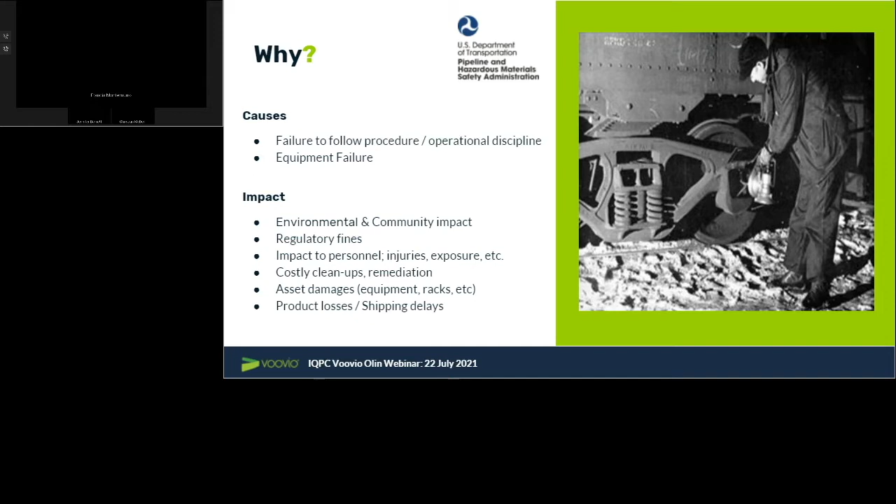So with that, it's my pleasure to turn it over to Jennifer Barnett, who's going to talk to us about Olin and the benefits they've realized using Voovio.

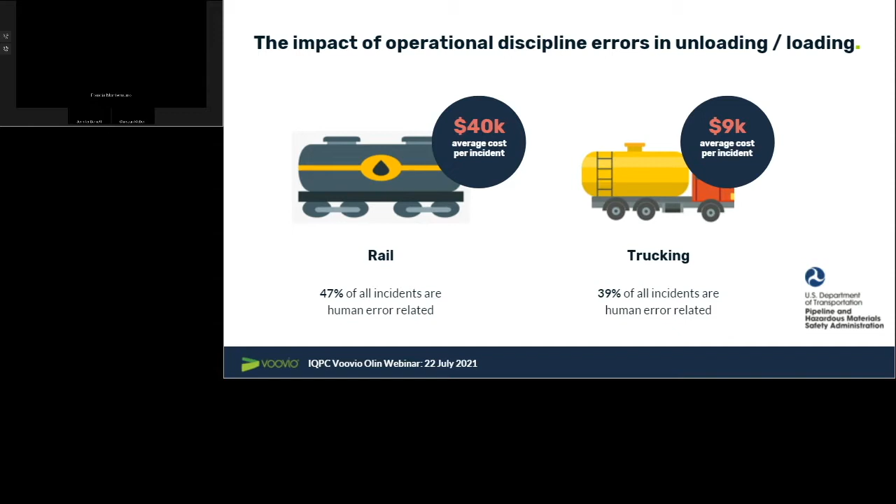Thank you, Fran. So talking about some of the key challenges at loading facilities, and I think it's probably common around every industry that tends to be our hiring point for new operators, that or it's contracted out services. So when we talk about some of the challenges, one of them is the quality of training our new operators are getting, and what's the consistency of that training. We tend to put operators with a senior operator, have them shadow them as part of that training program. So the training is only as good as that senior operator, the training they're providing.

One of the things, too, is a challenge is how do we train our operators to mitigate incidents before they occur? And one of those things is showing them and training them on proper preload inspections and postload inspections and how to identify equipment defects and things such as that.

Another challenge our operators have in a shipping and loading environment is not only are they having to certify in that area process or that loading rack and the procedures and policies for the site, they also have to certify for DOT certifications, and also they have to learn the DOT regulations. So it's almost kind of two certifications that go together.

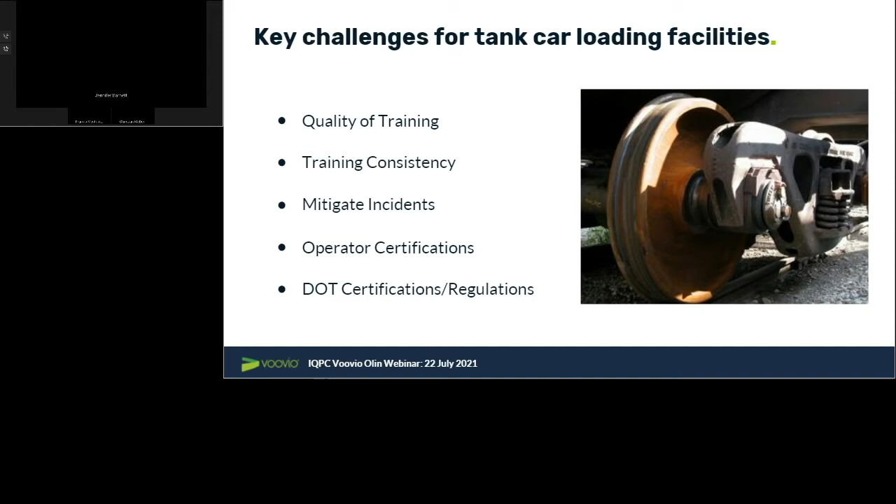So when we talk about the DOT regulations, there are regulations out there that state that, to prevent releases of the product, you have to inspect your cars before you can ship them. The federal regulation 49 CFR 173.31 subpart D states that no person may offer for transportation a tank car containing a hazardous material or a residue of a hazardous material unless that person determines that the tank car is in proper condition and safe for transportation. So that goes for loaded or empty cars.

And what that regulation means is that any closures, any valves, defects, anything that could cause that car to leak that is outside of normal accidents such as derailments or things like that. In other words, it needs to be able to survive the normal transportation conditions such as vibration or temperature change or anything like that. That basically says these inspections should identify that. You should be able to prevent all this. And if you do have a leak in transportation, then DOT will assume that you did not do the proper inspection of that car.

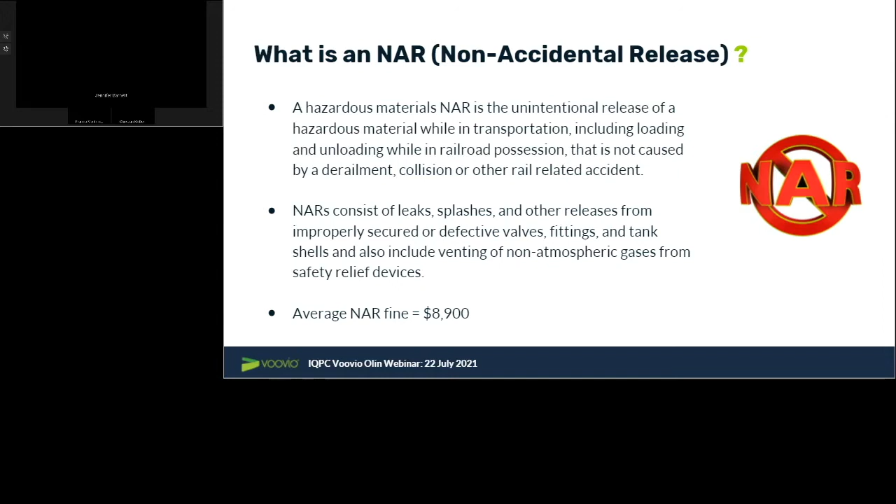I'm going to pass this off to Christian. Okay, thank you, Jennifer. So I'm going to share my screen here. Once it's open, could Nicole confirm you can see my screen? Yes, Christian, we can. Perfect.

So Jennifer and her team worked with us to create a solution for inspections and loading procedures. We're going to share the inspections piece because we're not permitted to show the loading rack area, but this will give you a great overview of the capabilities of the platform. And everything I'm about to show you on the screen may appear a little bit jumpy or jerky because we're sharing this over the conference platform. But if you were utilizing this on your laptop, like I am right now, it would be very smooth.

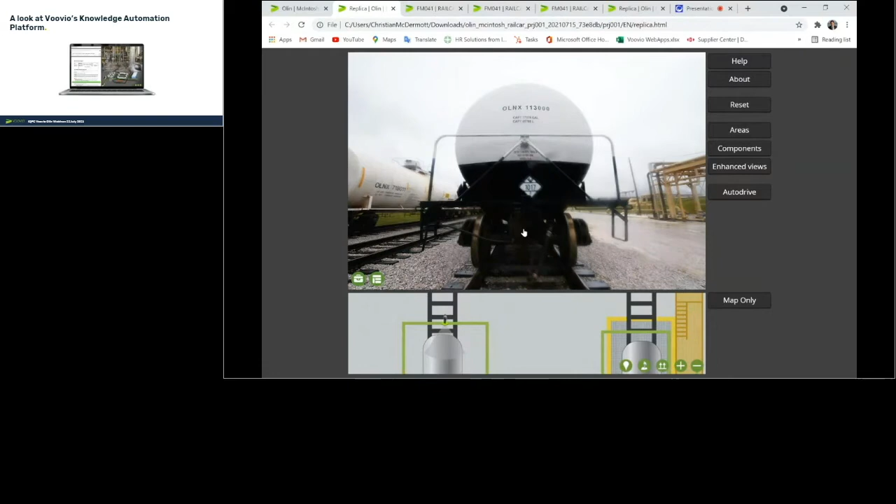So imagine I'm a trainee learning how to inspect rail cars and perform loading procedures. Typically I would have a few hours of classroom training, followed by some hands-on training at a rail yard, walking around a rail car with an SME or a trainer. But you'll see here, what I'm doing now is I'm able to walk around a real rail car. It's a real view of a rail car. I don't need to be in the rail yard, which are incredibly dangerous places. Plus, you need access to a rail car that has to be there and secured properly.

But with Voovio, you're able to walk around and look at all the different inspection points, which you'll see in a minute, 24/7. So I can access this at any time as a trainee. In fact, instructors can use this for virtual training sessions, or you can even use it for in-person classroom training events as well. So you'll see here now I'm at the B end of the rail car. All the components we're going to be looking at are clearly tagged and labeled. And you'll see that I can actually click on a component and get that close-up view.

And Voovio also gives you that ability to interact with equipment. In this case, I'm interacting with the handbrake. But we also simulated the securing and hooking up of a chlorine rail car for Olin, where trainees can interact with all the connections and all the tools they need to perform the inspection procedure and loading procedures as well. What I want to point out here is, as a trainee, I can search for any component around the rail car or the loading rack.

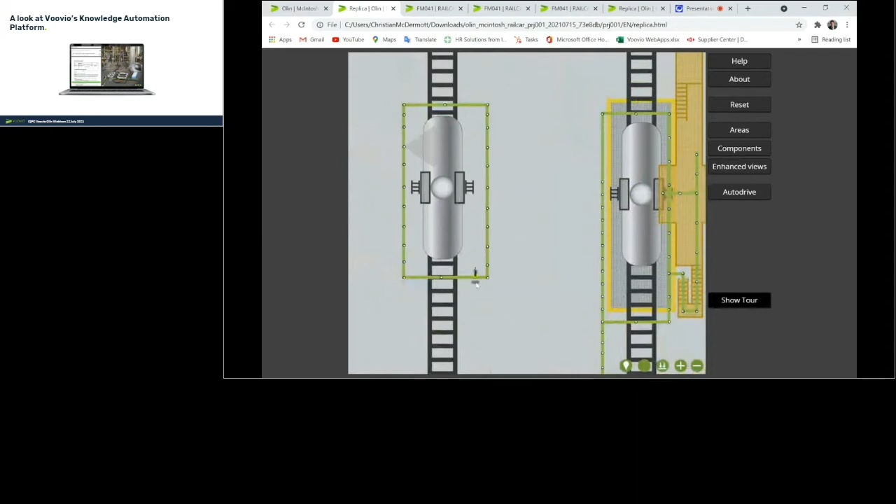So independent of an SME or a trainer, I, as a new trainee, can refer to this anytime, 24/7. The mapper, of course, I showed you. You can also drag and drop to any point in the replica. So great tool to familiarize yourself with the railcar. And I feel pretty confident now. I'm familiar with where everything is. I'm familiar with the railcar.

So let's move to the procedure. So as a trainee, I can practice and learn any procedure on my own 24/7 with this simulator. Now, this simulator I'm about to show you is a guided module, which means it's kind of like a virtual trainer, so a virtual SME. So it's something I can utilize ahead of any hands-on training and post hands-on training.

So let me explain what's on the screen. So we have the replica on the right of the screen. We have the map at the bottom, so I can always see where I'm located. We have the procedure here on the left. You'll see that this procedure actually is pretty text heavy, very long. There's a lot of different things going on. And in fact, it has over 300 individual action items that I will need to perform as the operator.

Above that, we have an action checklist. So the reason why we have this checklist in addition to the procedure is to kind of clarify any generalizations or ambiguous statements in the procedure. An example could be, a procedure might say, close all the vent valves, and it may not specify how many there are. If there were 3 of them, we would have 3 separate action items here. So it's incredibly important to drive that procedure clarity for the trainee or the operator here.

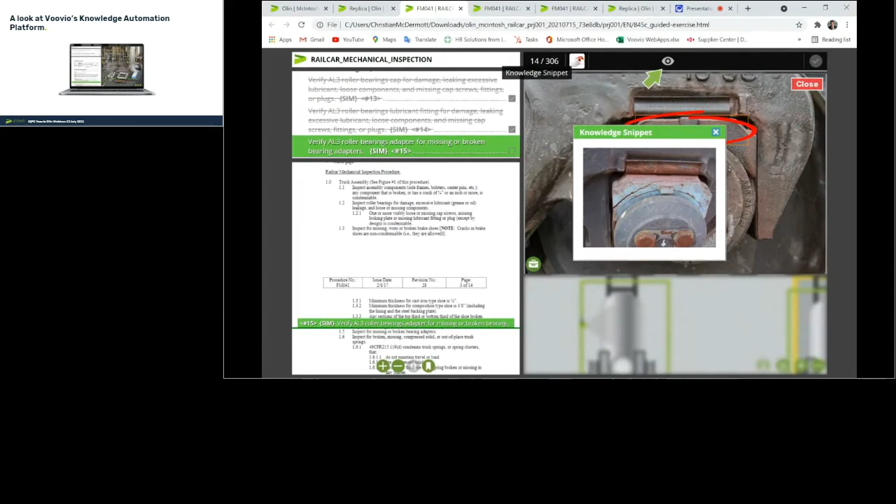And you'll see here that a knowledge snippet popped up which is showing me what a defected bearings adapter may look like. So these knowledge snippets are incredibly powerful because not only for knowledge capture and transfer, but it clearly shows what I'm looking for as the operator doing the inspection.

Now, in some knowledge snippets as well, you could have technical specs, such as this brake shoe technical specs here for the thickness of it. In this case, it's text. But you could also put videos in here as well. Videos are an incredibly popular and powerful knowledge capture and transfer tool that customers use all the time.

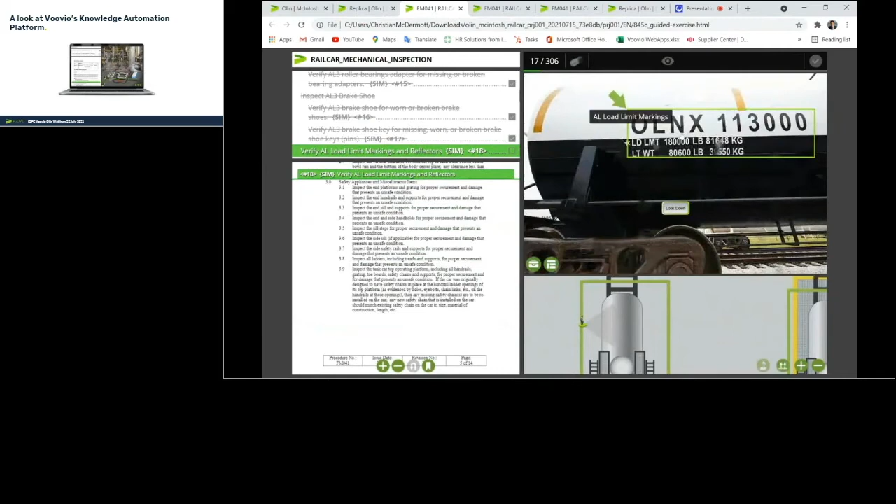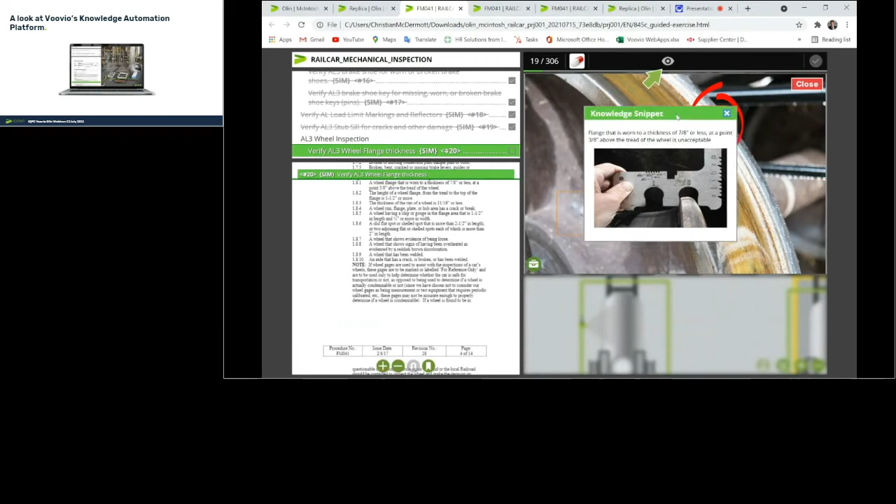And in fact, as I'm walking through this procedure, I'd like to point out that you can assign operators these modules before training, after training, and you'll see that we can actually even test operators on these procedures as well. I'll finish off here by showing you the last knowledge snippet, which utilizes the tool that you need to measure the thickness of the wheels. So again, we can add those types of snippets in. In fact, if you're in the loading rack or in the process area, we utilize virtual toolboxes where you can actually implement and attach hoses, bleeds, and plugs and things like that.

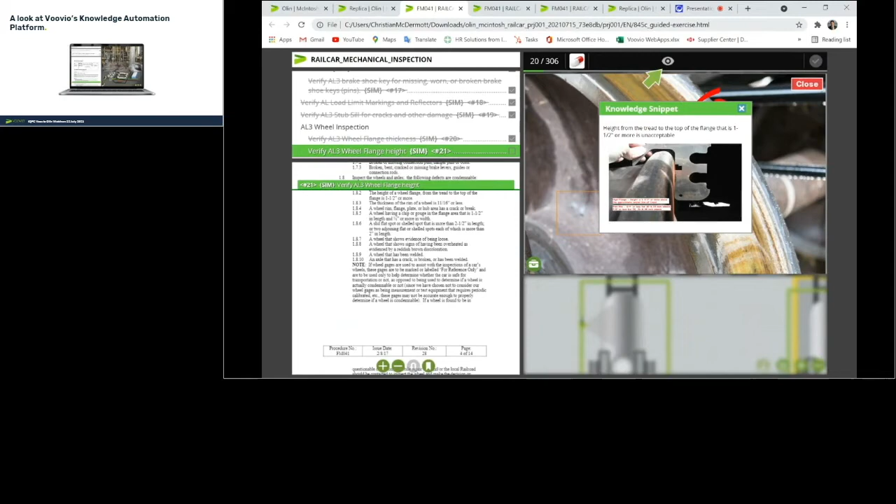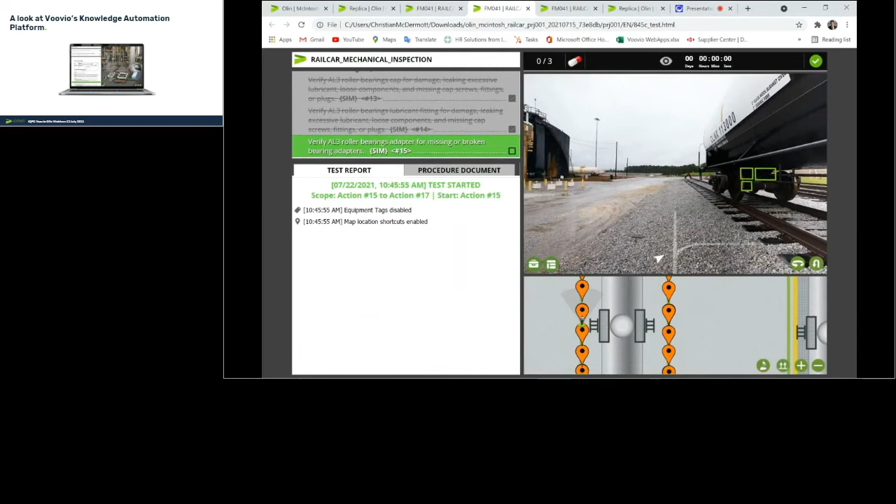So I think I'm pretty confident with this procedure. So as the trainee, I want to test my knowledge now. Or in fact, the trainer may want to test my knowledge on this before I do any hands-on field walkthroughs. So this is a simulator, which is a test. It's the same layout, but I'm totally freestyle here by the railcar. So I could actually walk around and interact with anything on the railcar. But I'm going to do the first step here, and the system will give me immediate feedback on whether I'm doing something correct or incorrect.

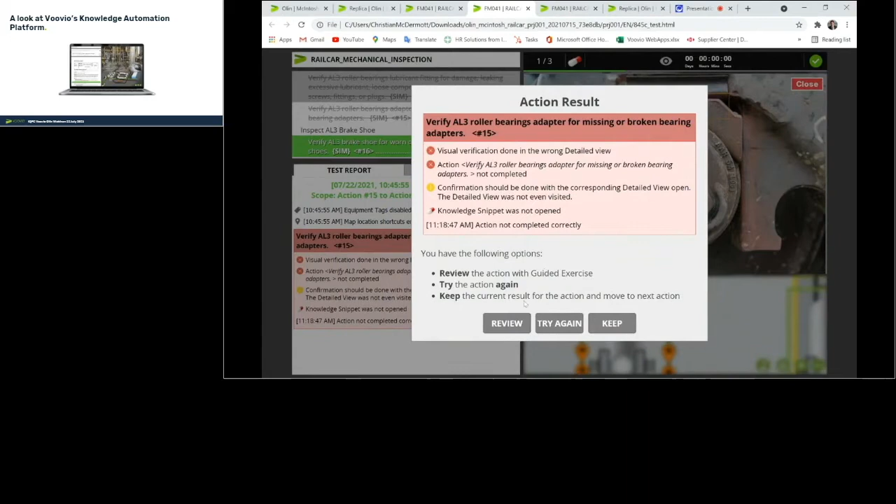So I think this is the A end left side third wheel roller bearings adapter. I confirm, and you'll see that I got it wrong, actually. So I get that immediate feedback. Because this is a simulator, the beautiful thing is that I can review my mistake and try again. So I'm going to click try again, and it will give me the opportunity to rectify my mistake.

So I'm going to walk down here, and I believe it is actually down right here. This was the correct wheel, third wheel, and this is the correct roller bearing adapter that I'm looking for. So I confirm, and you'll see on the left, I get immediate feedback, action completed correctly after 2 attempts.

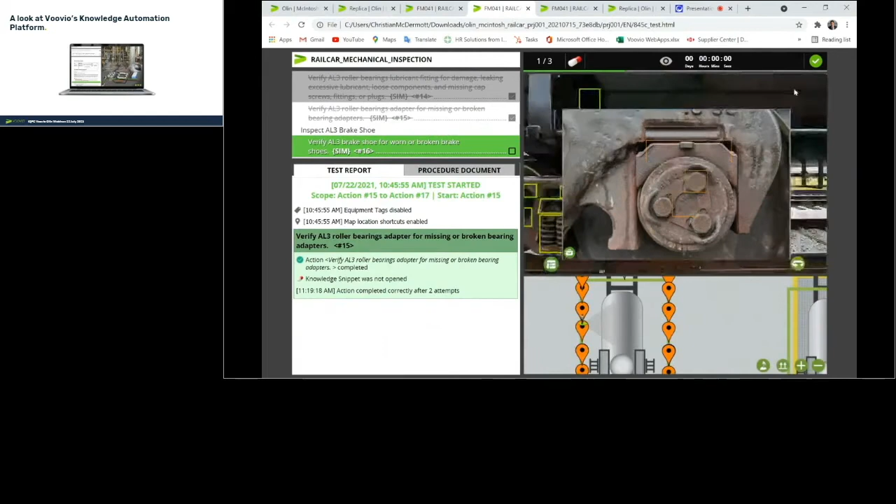So the beautiful thing about this test is that I can get that real-time feedback. All my progress is stored automatically in the cloud. And at the end of a test, I will get a report which looks something like this, with a detailed log of everything I've done.

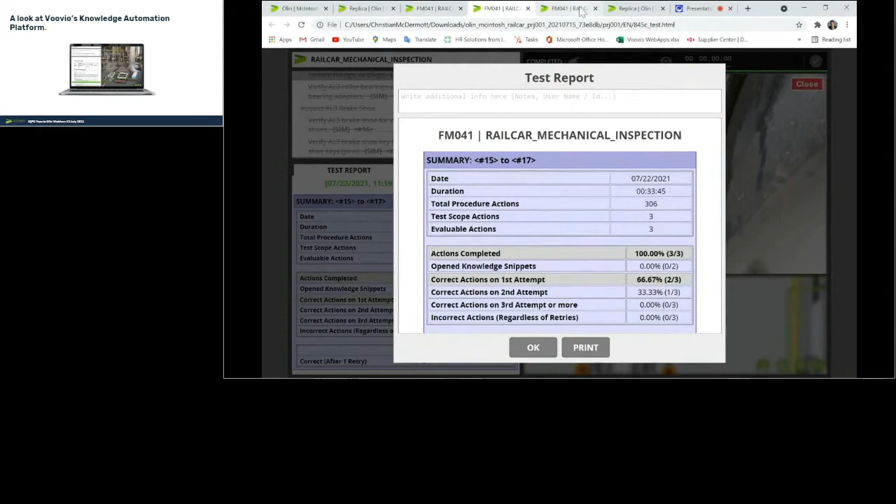In the cloud, we also have operator profiles. So as a trainer, you can assign and assess operators. And there are also some data analytics that come with it. So everything I've shown you so far is about building the competency before you go and perform the procedure, and also about measuring that and tracking it.

But what about using something when you're performing the inspection for real? Or it could be a loading procedure. So this is the field execution tool. This is like a visual step-by-step guide, which ensures I don't miss any inspection points here. So remember, this is a 300+ procedure. You'll see at the bottom of the screen, I'm on the first step of 306 steps. So it could be easy to overlook something.

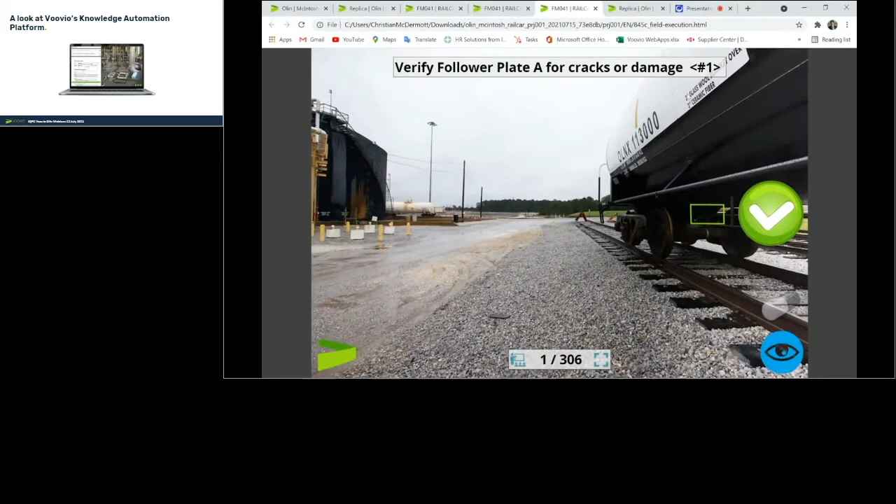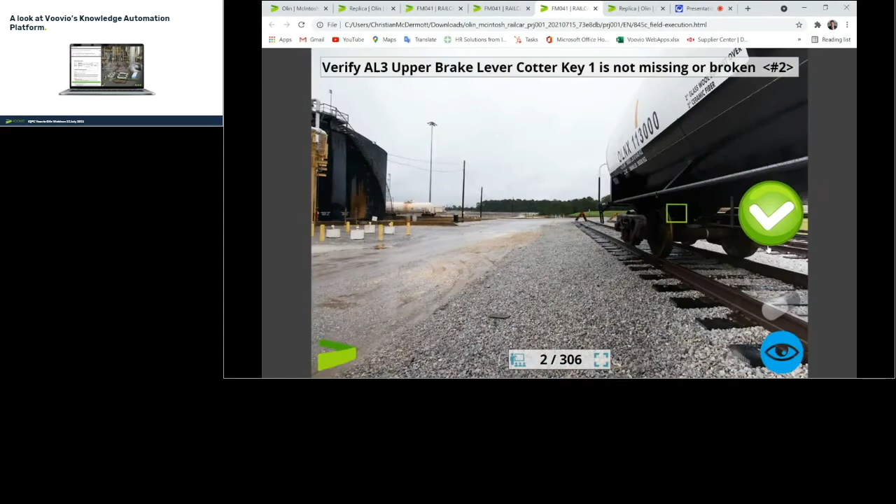This ensures I don't. So at the top, I have the step that I need to complete, the first step. And you can toggle between the detailed view and where you find that component on the railcar. I click this green check mark to move through the simulation as well. So as I click through, it will take me to the next step, and it will clearly show me what

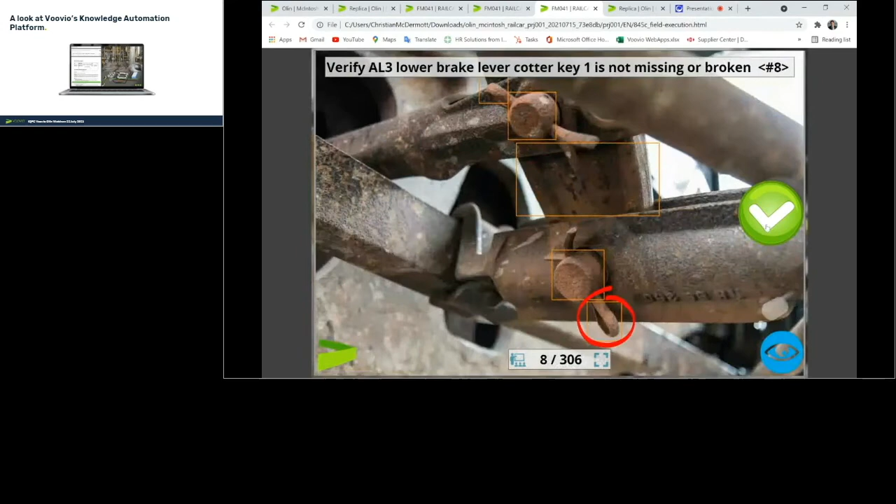I'm looking for. And in fact, you also have access to those knowledge snippets, which I'll show you in just a second here. So you can refer to what a defect may look like, or you can have those technical specs that you need when you're in the field. So there's very little chance that I'm going to miss something and make an error.

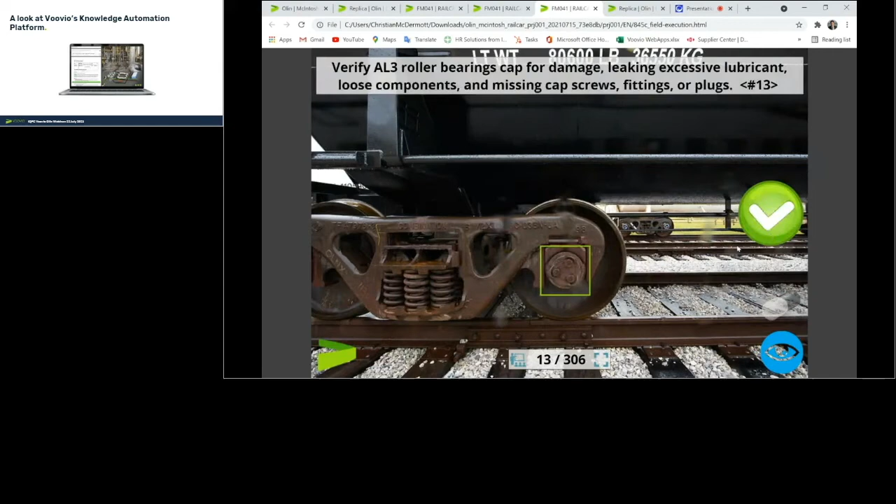You can also make notes as well. I'm going to type in something. I click OK, press continue, and those notes will be saved alongside that step. And the output of this is a report with all of that data. So we have each step I've completed, the timestamp and by whom, and you'll see in the very last step here, we have my notes.

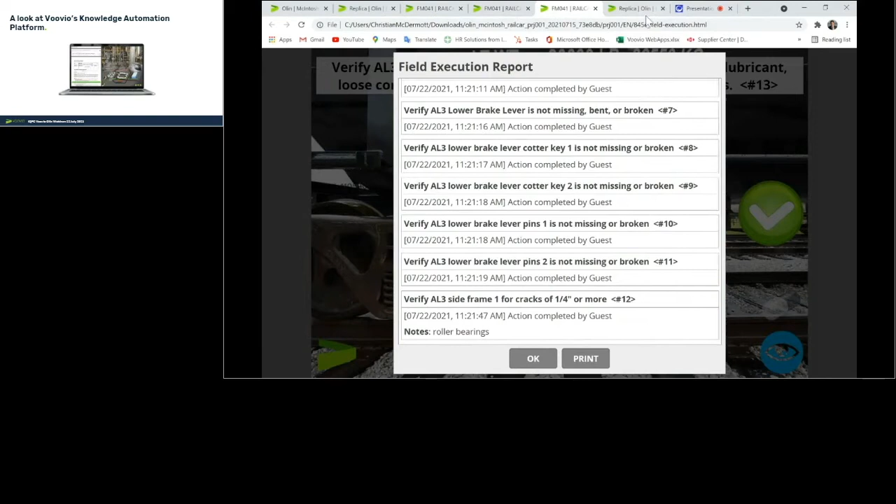All of this is, again, stored and collected in the cloud. It's automated, and there are some data analytics that come with it. So I'd like to finish off by showing you some enhanced views that we also did for Olin. I'm going to have Jennifer talk through two enhanced views, the first one being this valve. So Jennifer, talk through and I'll operate.

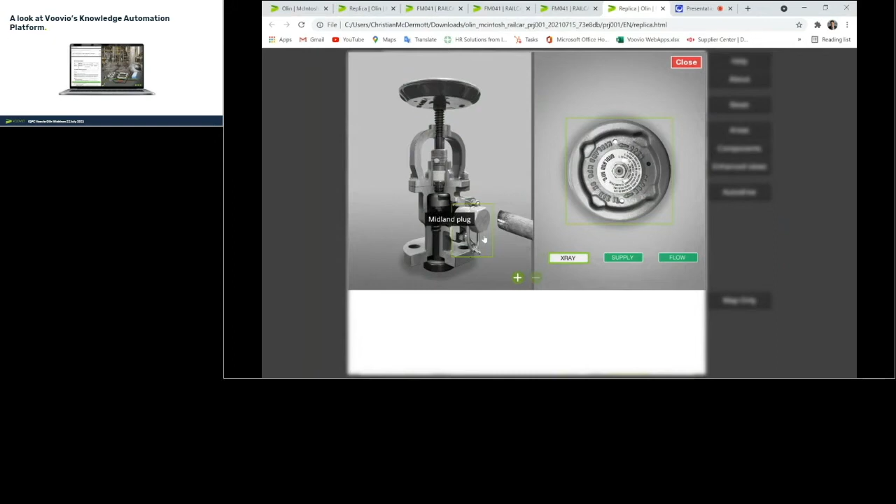So one of the things that we wanted to use for enhanced views is a chlorine angle valve for our chlorine loading simulation. And what this was able to do is give that internal visual to the operator so they could understand how the valve worked by using the manipulation as you see Christian doing now. So this was able to enhance that view so they could see the internal parts of the valve, which helps them incredibly in being able to identify leak points with this specific valve.

This view, we use as kind of a flow diagram to understand the loading flows or the offloading flows of a rail car, specifically a chlorine car. And then it helped them view that realistic internal view of how that car is being loaded and why it's important to vent your valves a certain way, or what closing valves will do if you don't have those valves vented the proper way. So being able to align those valves in that simulation gave them a really, really good internal view of what's going on in that rail car.

Well, thank you, Jennifer. And so now I'm going to stop sharing my screen and turn it back to Jennifer, who's going to talk on the next slide, I believe.

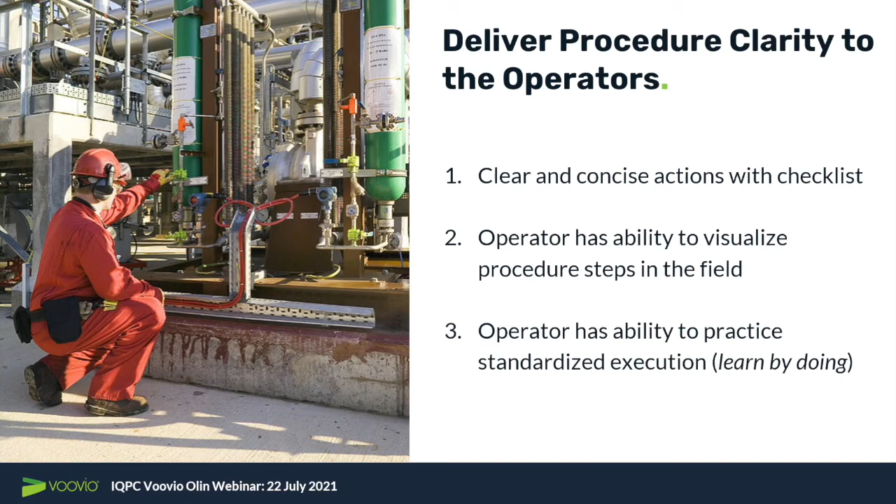In addition to that checklist is the visualization, the photorealistic view of their plant. So we marry that photorealistic view of the plant to the action checklist, and with that, they can then practice and learn by doing that procedure. And practicing 24/7 independent of the SME affords that operator the ability to gain confidence in that procedure and then demonstrate competency. So with that, I'd like to open it up for questions.

Nicole. Great. Thanks, Fran. First question we have is, how many internal resources do we need to do a project?

Christian, I can take that one. Really, again, it's very resource light. We need the SME. Once we show up on site, our engineers are very well versed in the industry, and we'll be on site for a couple days.

We'll need the SME to walk our engineers through the plant, demonstrate the procedures. Our engineers, again, are educated in the industry and will know what questions to ask to prove out those procedures. And then we go away and come back in 10, 12 weeks and deliver the final product. So very resource light.

Great. Next question we have is, do we need Wi-Fi infrastructure in the plant for Voovio to work? I can take that question. So do we need Wi-Fi infrastructure? We do not. For the field execution tool that I showed you, where we had the step-by-step visual walkthrough. So it wasn't the simulation, it was the kind of step-by-step visual walkthrough.